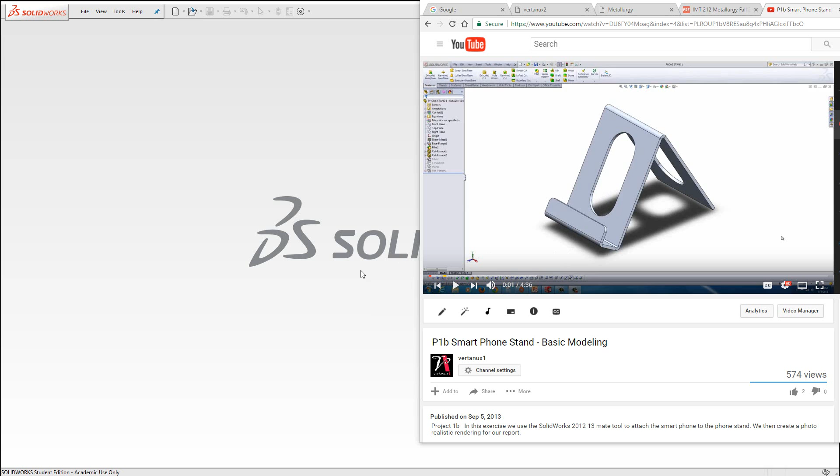Now, the metallurgy information, if you go to vertanux1, vertanux1.com/metallurgy.html, there you'll find everything you need pretty much for this.

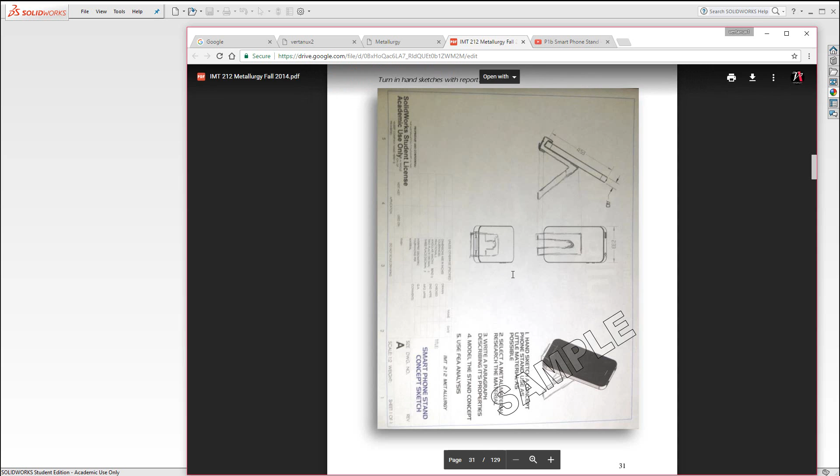The metallurgy training guide, which I have up here, actually has the samples. What I'm going to have you do first is, as you can see here, pass out some drawing paper, and you're going to hand sketch a little bit of a design here. Actually, we'll do that after we come up with our design for our phone.

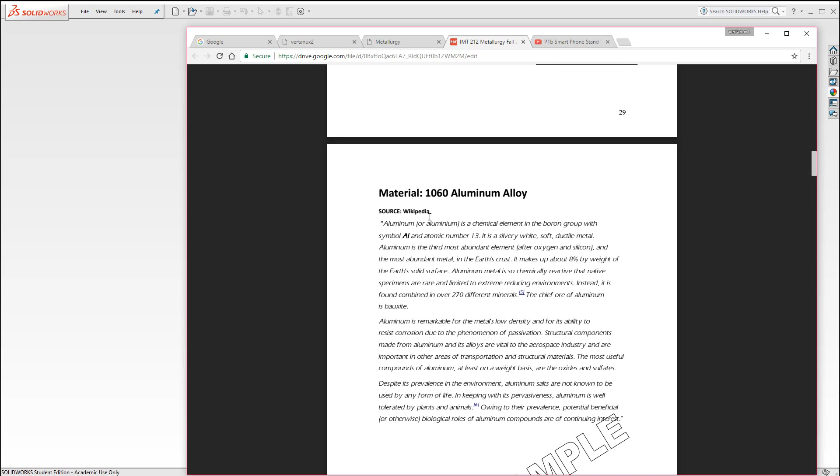Here is a sample of information you'd grab off the internet. This was off of Wikipedia. I don't want you to just use Wikipedia as is, but you have to change it. Otherwise, remember, you have to put it in quotes and source it properly. So that will come later.

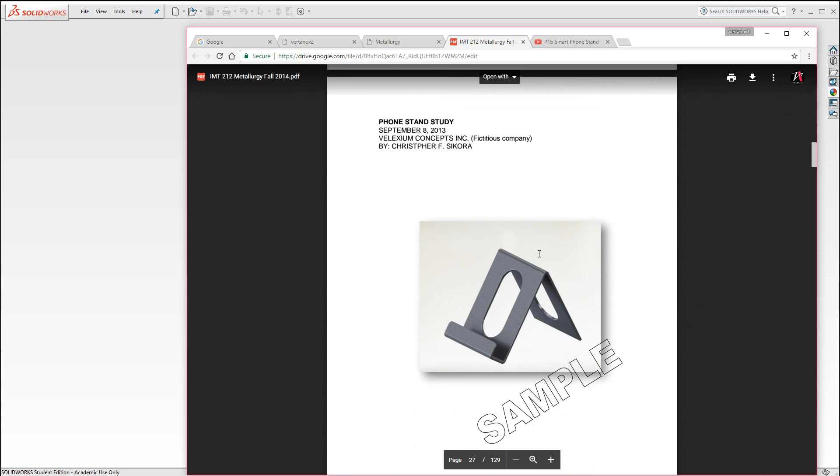But here we can see the drop test analysis that we're going to go ahead and complete. And as we move further up here, there's actually the profile that we're looking to create.

So let's begin with SolidWorks. First of all, start up SolidWorks 2016 on your screen. And you're going to go up here, there's a little white sheet of paper, New.

But otherwise, you could see over here, there's this little arrow. If you go to that arrow, it gives you the pull-down menus, and I like using the pull-down menus—they're a little easier to navigate than just trying to describe an icon to click on. Once you get that, tack it in with that little thumbtack, then go to File, New, and select Part. Just click on it and hit OK down at the bottom.

Now, what you'll see in this view screen on the left is called the feature tree, or the FeatureManager Design Tree. It's going to contain all of the history of everything you do making this part, everything from the sketches to the extrusions or features that are created.

Up top is your ribbon, these little tabs—this is the ribbon tab. Essentially you'll have Features and Sketch. Go ahead and click on Sketch. All right, those are all your sketch tools up there: lines, circles, arcs, rectangles. That's what you could use to sketch whatever type of geometry you want.

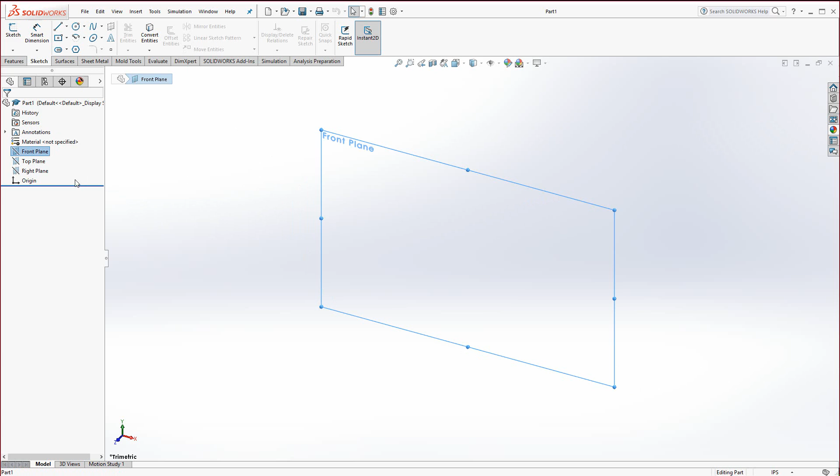Go ahead and select the front plane here on the feature tree. You'll see it highlight in blue when you click on it. Actually, instead, because this is going to be a phone stand, let's select our right plane, and we'll draw the right side of the phone stand.

Versus if we were to draw it on the front, our phone stand would be sitting sideways. So let's click on the right plane, and right here you might get this quick launch tool to appear—if so, it's right next to the eyeball. Click on that sketch, and it will start a sketch on the right plane.

Otherwise, go up here to the Sketch tab and click on Sketch. Beware, do not click on 3D Sketch or 3D Sketch on Plane. Even though this is a 3D modeler, we're not using that.

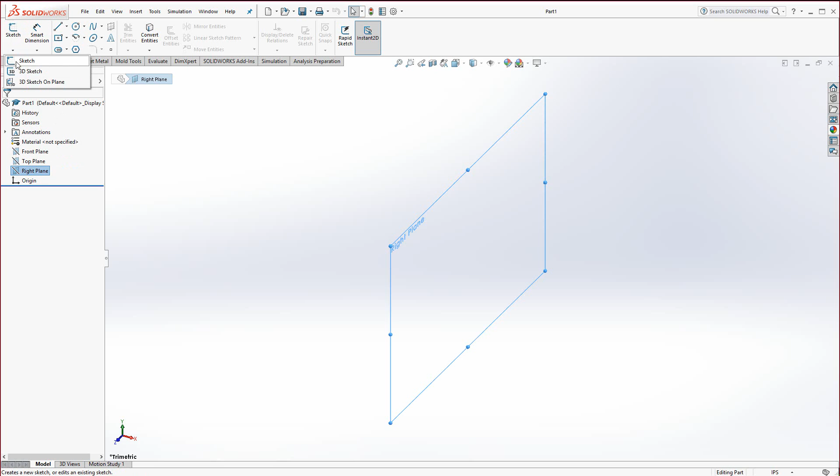Click on Sketch by itself. Now take your line tool. Our goal is to create what was in the book there, and I'm on page 25 of the manual.

You can see it's an angle bracket design somewhat. So we're going to first go up here and hit the little arrow to the right of line and find center line. We're going to draw that center line first. When you click on it, move your pointer and you have a cursor, and it turns orange once you get it to that red origin. That's your center marker in space, your 0x, 0y, and 0z.

When it turns orange, click and drag up a straight line, just like I have. One way you know it's straight: if you get the little yellow box to the right of the pointer and it has a vertical line in it, that means it's straight vertically. Make it about 3 inches. Now that number you get there is just to get you close. Don't worry about it, we're going to add dimensions later on. It's just to get you about 3 inches or so, that's pretty good.

Click, and then you'll see it will try and chain. Hit your escape key in the upper left corner of your keyboard, and it will take you out of that chain. Okay, now again we need to take a look at the manual here.

We have a line going at a 30-degree angle off of it, and then another line at 60 degrees, and it's aligned to the base, and then this little angle here. And it's 2.5 inches in length. So here's what you want to do.

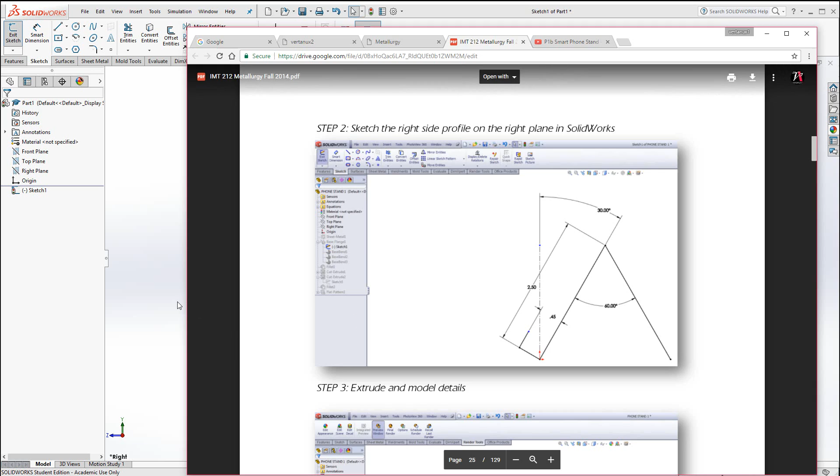Now use just the ordinary line tool, it's just line, not center line. Start off at that origin again. When it turns orange, click and drag it at an angle. Remember, it's about 2.5 inches, so look for about 2.5, and you have it at a slight angle like where mine is. 2.73, that's fine, as long as it's close.

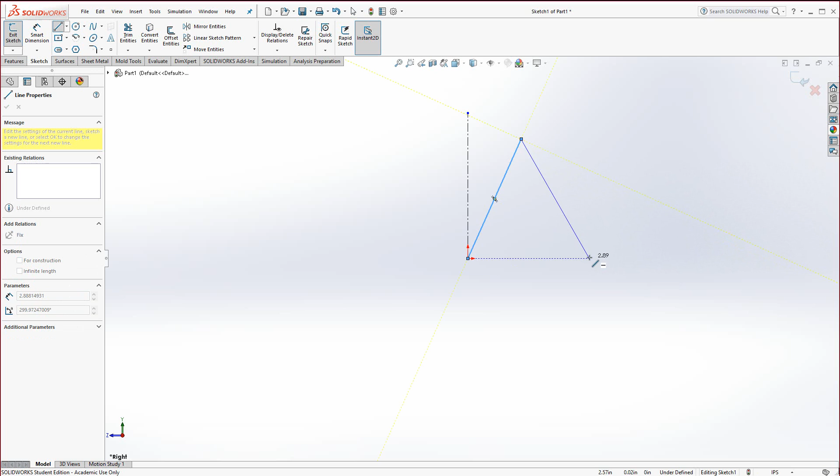Click. Now drag down and drag it down about at this angle, and see how I can infer across—I get that little dashed line. That's an inference line, means it's locking in vertically to that center. But it's actually not going to lock permanently, it's just snapping to it. Go ahead and click, and now hit escape.

Let's add some dimensions there. Go to Smart Dimension up here in the upper left. Click on it, then click on the actual center line. Now, a lot of people like to click on the ends or the middle of the center line—stay away from those for right now. Click on the line as a whole, see how it all turns orange? I'm like right about here. Click. Now, same goes with this line.

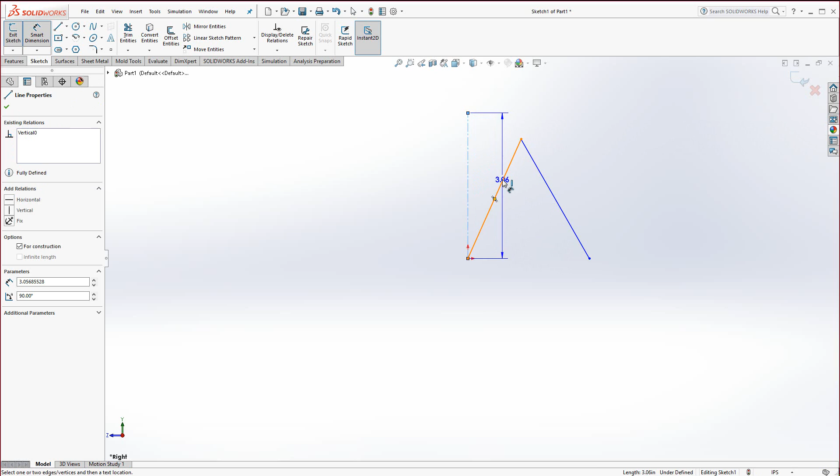Don't click on the ends. Click somewhere on the line about where my pointer is so it turns orange. Click, and get in between those two lines where I am, and you'll see it gives you a dimension. Click one more time. When I say click, I'm saying click with your left mouse button, okay?

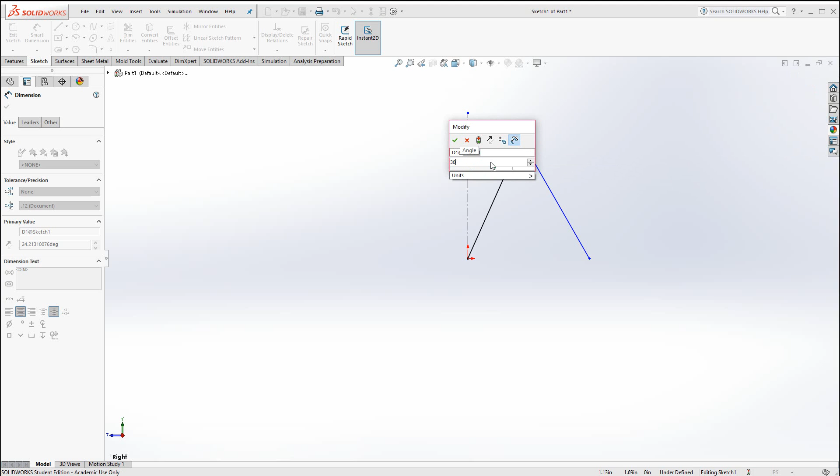Type in 30 on your keyboard. Now, you might have to hit the number lock if you're using the keypad on the right. Hit that little number lock button to make sure numbers are on. Otherwise use the numbers at the top, that's fine too. All you have to do is type it—look, you don't have to click in here, it's automatically illuminated. Just type 30. You don't have to type 3.000 or whatever, just 30. Hit enter, and it will change that.

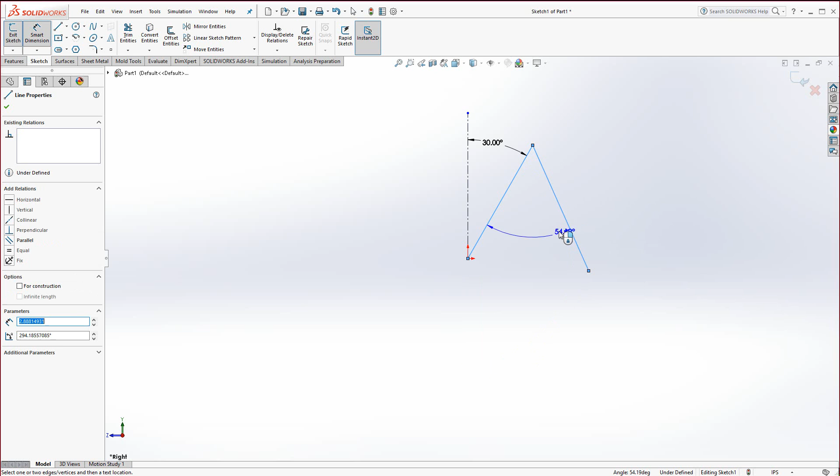Now let's do the same over here. Click on this line, again not at the ends, not in the middle, just somewhere on it so it turns orange. Now go over to this line, and don't panic when you see that weird dimension—it'll change in a second when we click on this line. Now get between the two, click and type in 60 for 60, it's a 60-degree angle.

Go ahead and hit escape. Now what we want to do is lock this in vertically to that line. So hold control down—notice the control key is in the lower left corner, that's a typical one you want to use. Hold that control key down and don't let go. Now move your pointer over the origin. When it turns orange, click one time and release it. Now move your pointer to the right and click on that little dot while holding control. This one's the critical one. Control enables you to select more than one object, otherwise it turns itself off.

So click while you're holding control. If you didn't get these little add relationships over on the left, hit escape a couple times and try that again. Holding control, select both points, 1 and 2. On the left, what we're looking for is vertical.

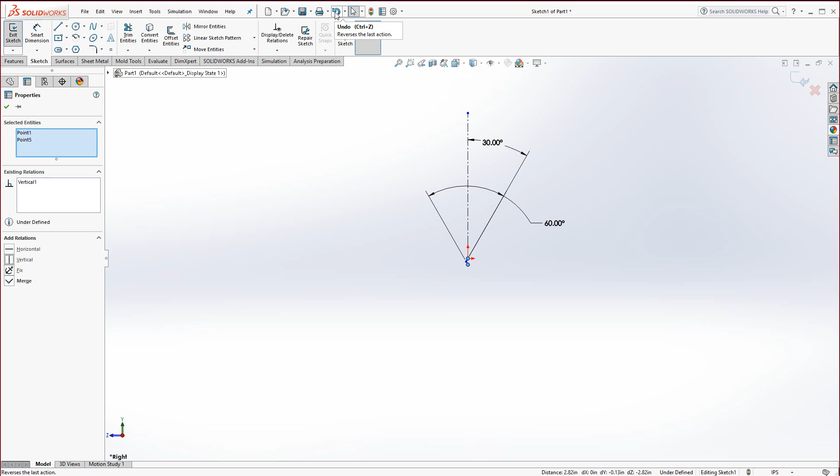Oops, look at what that did, it moved it to the line. Now this is where we have the undo button up here. Take a look, there's undo. Hit undo up here, it's that little arrow.

Now let's go with horizontal and see what that does. Look at that, it aligned it. If we were to draw a line across here, it'd be perfectly linear to it. So there we go, okay, now let's take a look.

We want to go back to Smart Dimension and click on this line right here, see the one that's turning orange? And unfortunately, I still had something selected. So it's not a hard thing to just hit that little red X right here on Modify.

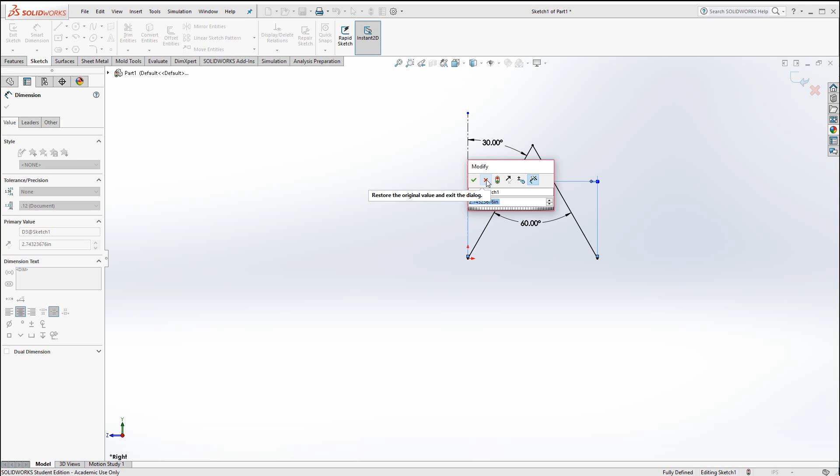I made a mistake. Now you could actually hit the delete key when something is selected. If it's not selected, hit escape and click on the line here, this thin line for the dimension, and hit delete on your keyboard, that's right above the arrow keys, the delete key. Go ahead and hit it one time and it deletes it.

Okay, now what we can do is let's click on that line, just on it, not at the ends, and drag it out just a short distance. Notice it's parallel. This dimension is parallel. That's what you want. You don't want this, you do not want that.

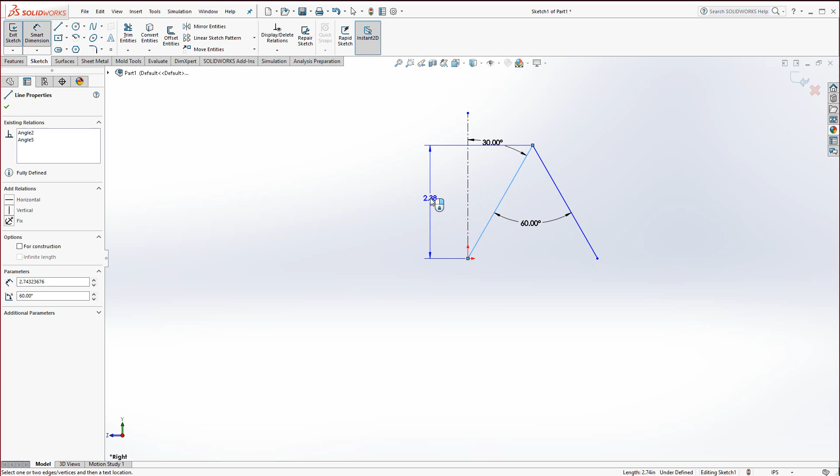Get it to where it's parallel, click, and type in 2.5. Again, you don't have to type 2.500, just 2.5, hit enter. And look at that. Now all we have to do is go back to the line tool now.

Go up to line and glide up to this point right here, click, and follow this line out, maybe about an inch or so. Okay, right about there looks pretty good at an angle. And then follow this.

Now look at this, I got perpendicularity. See that little perpendicular symbol? It looks like a half of an I-beam to the right of the pointer. It's in yellow. You want to try and get that if you can. Okay, and just click up here.

Don't worry about the dimensions so much because we're going to add dimensions now. So it's just a little line at that angle and up here. But let's make this line perpendicular to this because I don't think I captured that. We could add a dimension of 90 degrees, and that's perpendicularity, but I'm going to show you an easier way.

Rather than typing in numbers, hit escape on your keyboard about 3 times just to make sure you don't have anything selected. Now, holding control, select this blue line right here, and you're still holding control, click on this line right here. If you didn't get those two, hit escape a couple times, hold control, try selecting them again. Really, you only have to hold control for the second or third items. In this case, there's only 2, so it's just the second item.

Over here to the left, you'll find perpendicularity. Click on that, hit the green check. Now notice the line turns black. As you fully define these things, you know they're finished once they turn black typically.

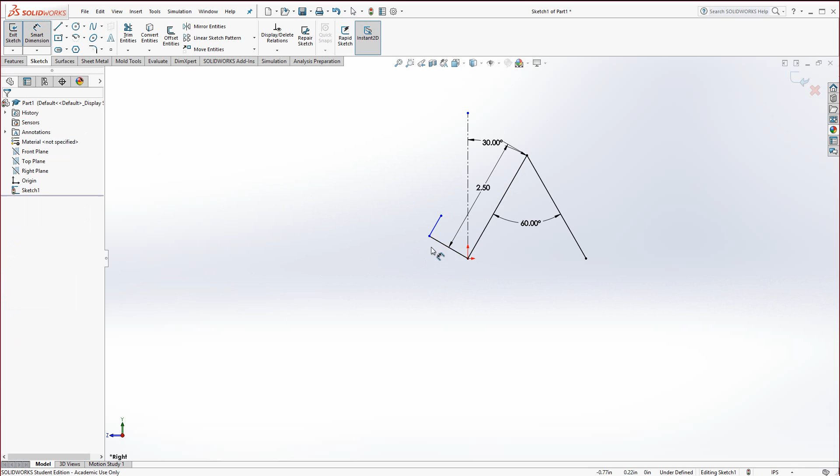Okay, let's go to Smart Dimension. Click on this little line right here. You could click on the endpoints too, either or is fine. But try and get it parallel like this. Get it parallel. Don't get it down like that's good, but don't get it down like this. You don't want that. So click here, and let me take a look at the manual.

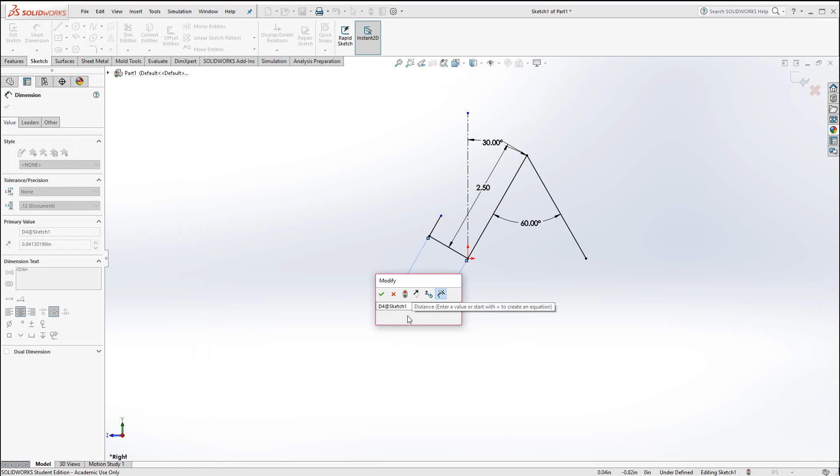That needs to be 0.45. Now be aware, you could use a ruler on your, or a scale on your phone if you want to make this for yourself and change these so your phone fits. This was designed for like a typical smaller sized 4-inch screen, 4.5-inch screen, so this might not fit all.

Now go ahead and click on this line. Again, stay away from the ends on this one. Drag this out again so it's parallel. It's a little tricky there, but once you get that down, let's take a look. The manual says that needs to be, you know, I don't have a dimension there, but let's go ahead and put one in. Let's make that

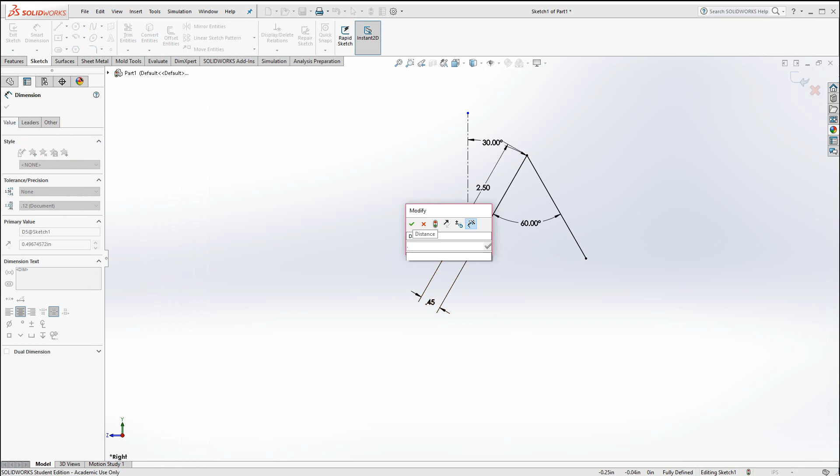0.375. Okay, by the way, you might notice I'm actually in IPS here. This is how you change it from millimeters to inch pound second. Make sure it's an IPS. It might scale it, and you'll notice it's very small.

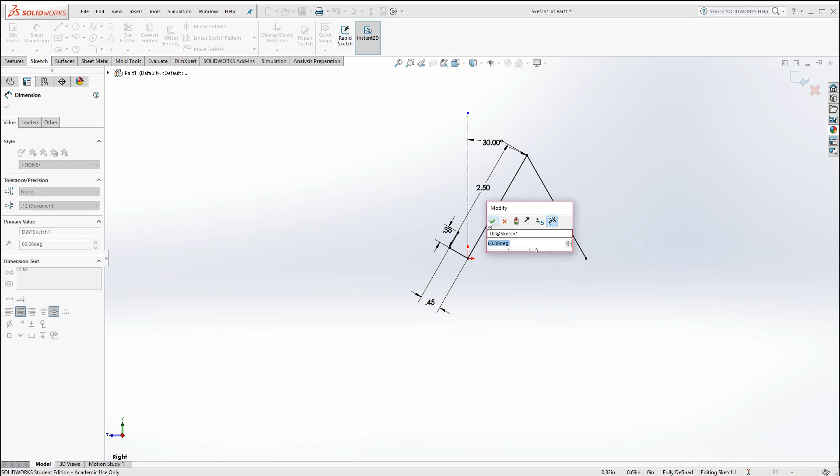If I forgot to tell you that earlier, my apologies. But you could go and double click on the dimensions and change them if you need to. The angle dimensions should stay the same. It would just be these.

Okay, now I noticed, there we go, it looked like I had a little arrow there. Just want to zoom up. You could zoom in and out with the scroll wheel on your mouse. Just scroll it back and forth, point where you want to zoom to, and keep that focus point as you scroll back and forth, and you could rearrange it.

Okay, we're ready to extrude this, but first we've got to bring up the sheet metal tab. Now I have the sheet metal tab, you probably don't, but if you don't have it, remember this is the ribbon. Right click on any of these tabs on the ribbon up here - right click, that's the button we hardly ever use. Right click and find sheet metal and check that box, make sure it's checked, and then you should see the sheet metal tab appear. You might have to click on it.

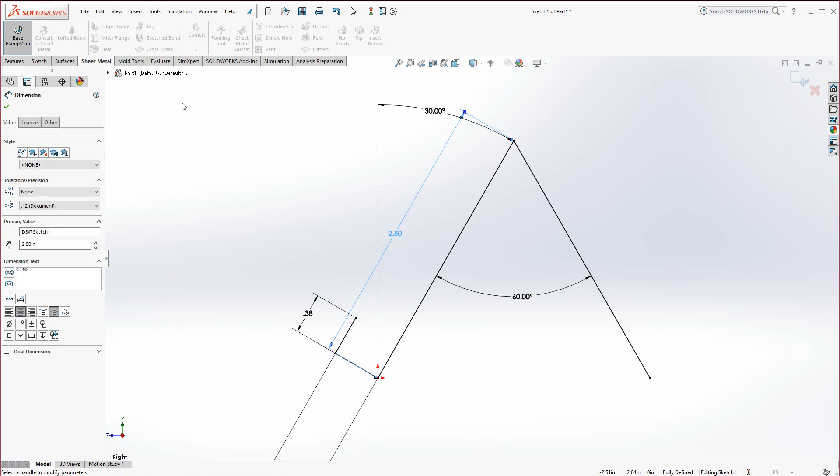And now find the base flange tab. The reason we're doing this in sheet metal is that we want to be able to flatten it and have it cut out using shears, or else we could use plasma or water jet or whatever.

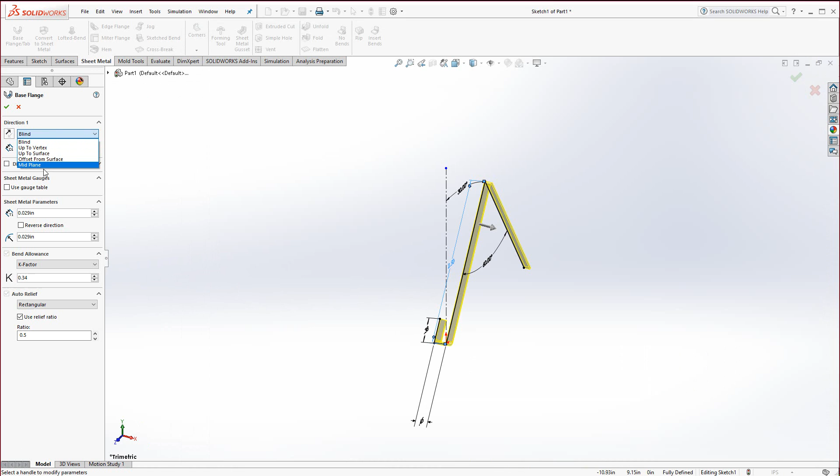Okay, now for the width of this model, let's go ahead - first of all, in the upper left, look carefully what I'm selecting. Hit this little arrow to the right of blind, select mid-plane, set it to 2.5. Oh, that's awfully big. So actually, let's go with 1.5. And you see it changes the width. That looks pretty good.

Okay, now over here, there's sheet metal tools like sheet metal gauges. We're not going to use a gauge table, but the sheet metal parameters, as you can see here, this is the thickness.

Let's go with a little bit thicker, like 0.062, 62 thousandths. Depending upon the sheet metal you're using, if it's aluminum or stainless steel, the thicknesses can vary for the gauges. So you have to be careful to look at your gauge tables - usually you have them in a book. Each company is a little bit different how they have this, but we'll use 0.062. So it could be either, dependent upon - again, it could be a 16 gauge, it could be 12 gauge, depending upon what material you select. Don't worry about that right now, just make sure it's 0.062.

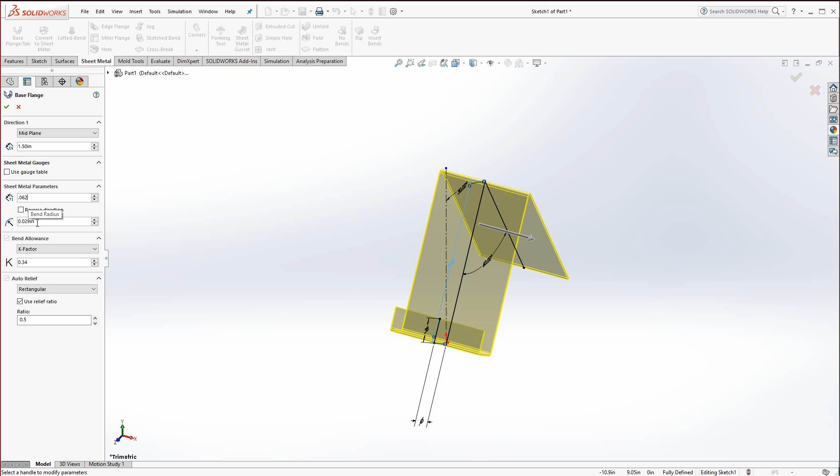And then here is the inside bend radius. 0.029 is a good bend radius. You could set it to 0, but sheet metal fabricators typically don't like to have it set to 0. It makes their job more difficult, and it's a more expensive process to ensure it's done right. So usually you want to put a little bit of a bend radius in there. That's the radius that - for example, if you zoom up here where the bend is occurring, that's what we're talking about.

Okay, so over here, the bend allowance, go with a K factor of 0.34. Notice that there's several different things - there's bend tables, bend allowance, bend deduction, bend calculation. If you want to know more about those, you could always click on the help button up here, the little question mark, and it'll take you to the web. And here you could look up all these different things.

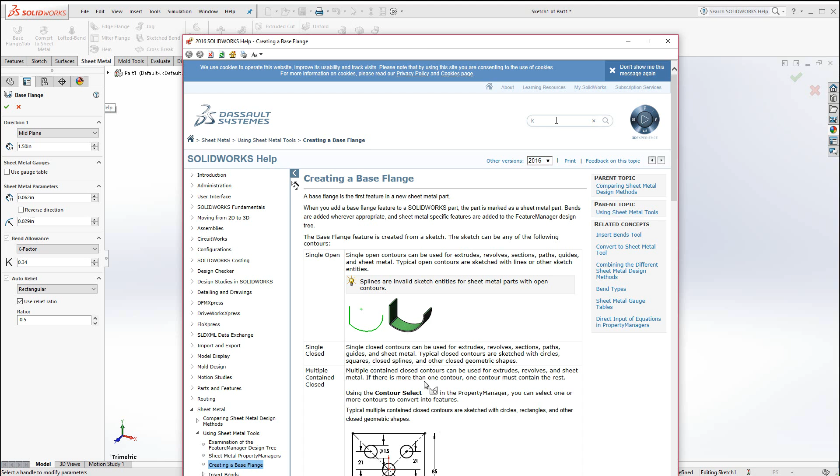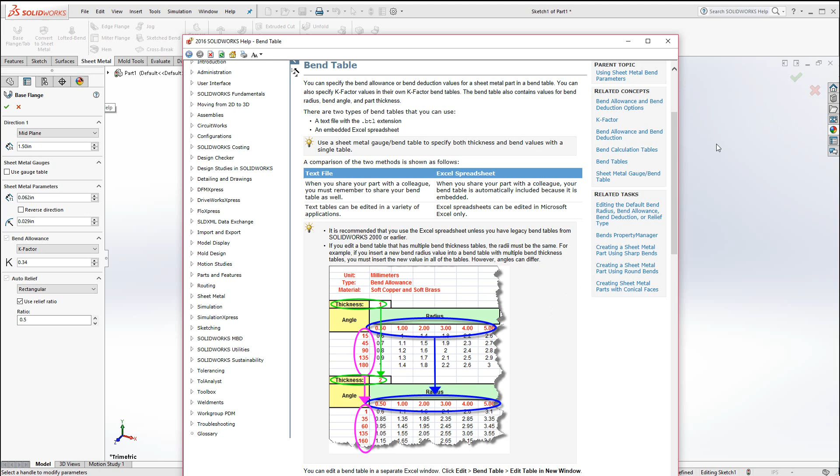Okay, we're just going to leave the rest at this default. Hit the green check mark. And let's go ahead and save this. So find the little floppy diskette up there, save, and you're going to go ahead and name this P1.

Save it maybe to your desktop, or save it someplace you know you're going to be able to find it next time.

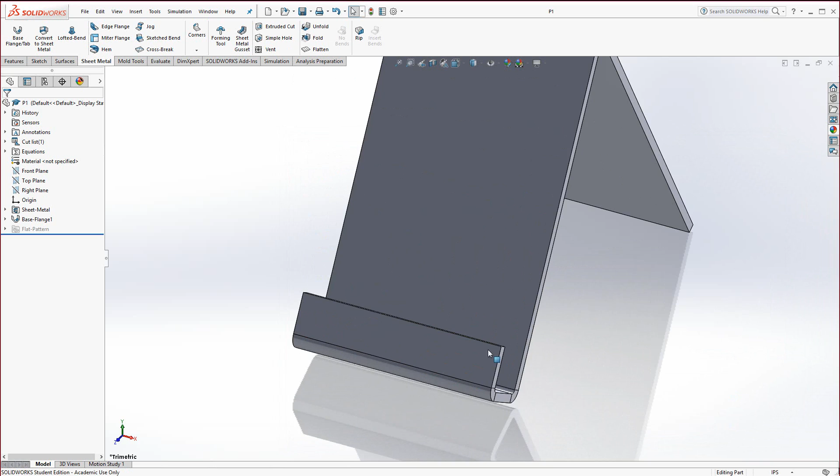All right, we're looking pretty good there. Let's now see these corners. Those are kind of sharp, and that might scratch our phone as we put it in place. So let's put a fillet.

Go to the Features tab right up here and find Fillet. Now set your fillet to, we'll set it to 0.125. Actually, let's set it to 0.2. And it's like filing it down.

So rotate this. The way to rotate, by the way, you could hit your arrow keys on your keyboard and then scroll, or hold that scroll button down, like push it down like it's an actual button, and then move your mouse left, right, up, and down. You'll see it will rotate. Otherwise use your arrow keys — it will rotate in 15-degree increments and so on. But anyhow, you could rotate.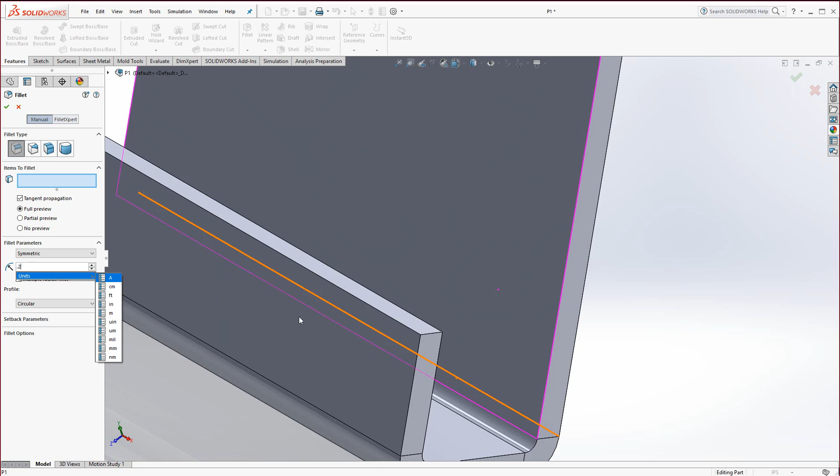Maybe play with this a little bit before you go putting the fillets on. You might want to pause me for a moment and learn how to rotate a little bit. It's a great thing. Otherwise you could also hit your space bar, and that brings up some tools too. But anyhow, take a look over here.

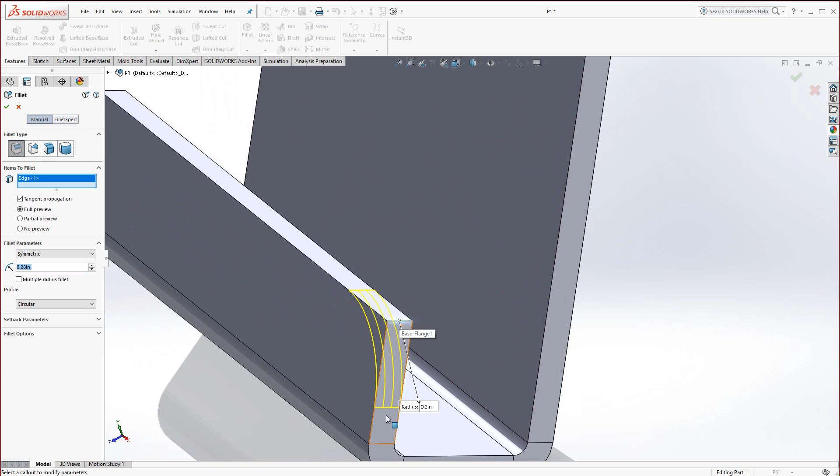Let's resume. See that edge right there where my pointer is gliding over? We want to go ahead and click on that, and there you could see the fillet. Now you may not see that fillet unless you click on Full Preview here, so make sure Full Preview is selected.

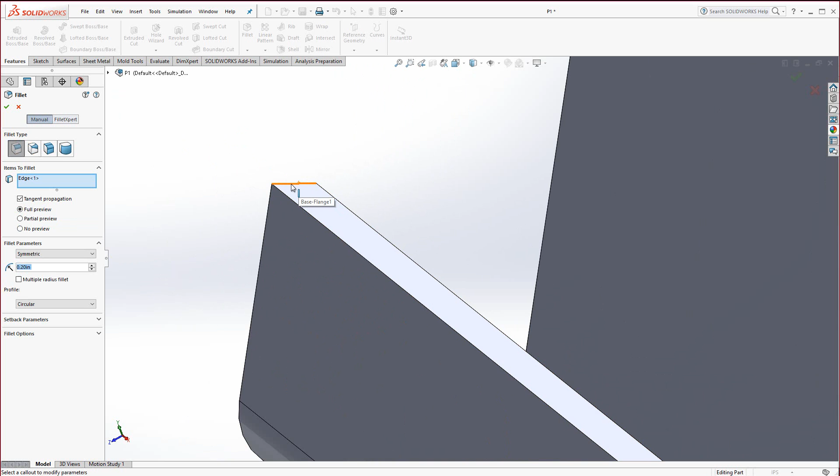Now be very careful, don't select faces. See, like if I select this face, it just turns blue, because it's too small of a face to add that type of a fillet to. This is an edge. When you see the edge turn orange, make sure you're selecting edges for this one. Click on that and you can see your preview.

Let's get the backside too so it doesn't scratch our desk. Go to this corner, click, and this corner, click. Again, I'm using the scroll wheel and pushing it down to rotate. Hit the green check. Okay.

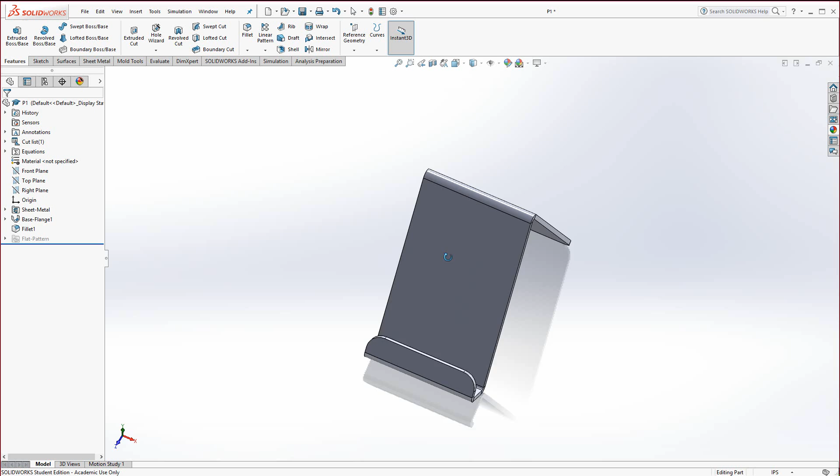Now we're going to go ahead and flatten this so we can put a design on it. This is where you're going to want to hand sketch a couple different designs to put on here. So you could pause me for a while and then take out your paper and come up with your hand sketch.

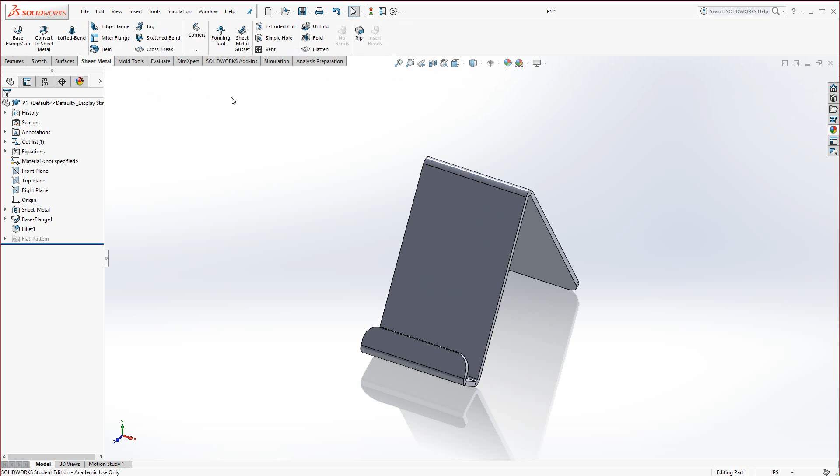What I'd like to do here is we're going to go ahead and go to the Sheet Metal tab, go up here to Unfold, and select, let's see, this face as our fixed face. Hit Collect All Bends right here on the left, and hit the green check mark, and it should flatten it. And there you have your flat pattern.

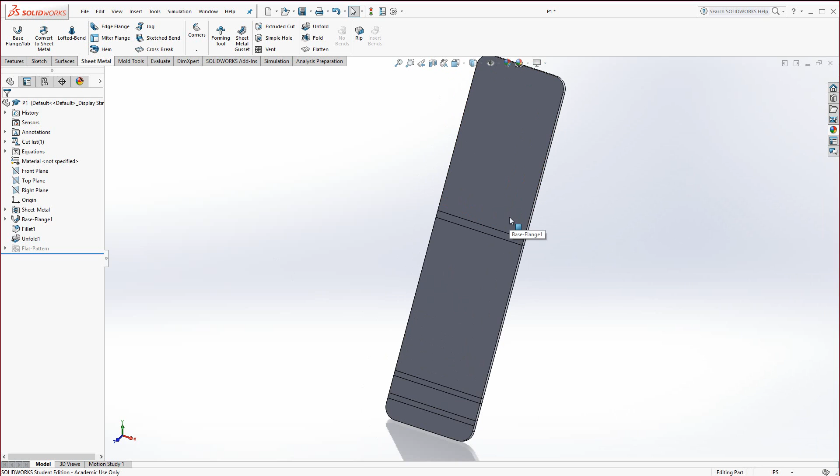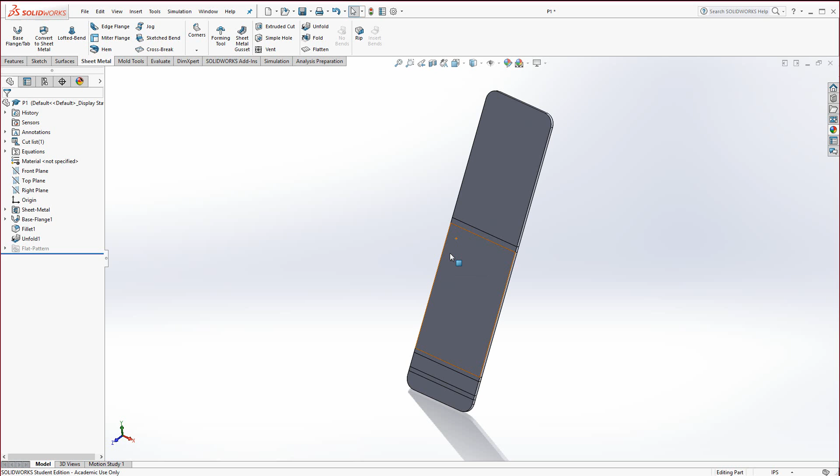Okay, and this is what we could use to cut it out. We could actually export this and bring it into a drawing, then export it as a DXF file, which is a very common file format used for laser jet, water jet machines to cut it out. Or you could even just print it out, lay it as a template over your sheet metal, etch it in with a pointer, and then cut it with shears. That might not be easy — especially 62 thousandths might be kind of hard there — but usually you want a die press or some other sort of method.

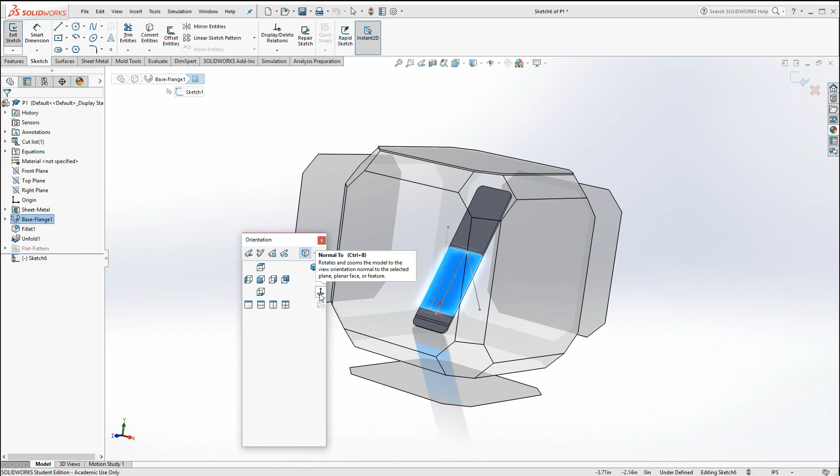But we flattened it in this case so we could actually design our geometry on it. So select this face where I want you to design something and start a sketch. Now hit your space bar, and that brings up this orientation box. See this little button right here? Click on Normal To, or you could use the ice cubes, but in this case we want Normal To, so we go flat or planar to that face.

Okay, now I'm going to draw some geometry up here. I'm going to click and draw out a circle, and then click and drag out another circle, and make a half moon there, or we could do something else. Let's see, we could make some different lines.

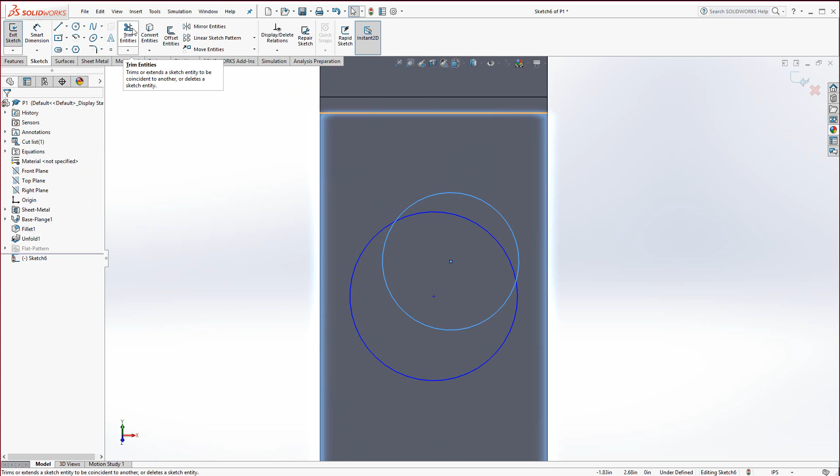So we could go to Trim Entities — hit escape on your keyboard, go to Trim Entities up here. You'll see there's Extend as well. Oops, didn't want that — make sure you're on the sketch tab, the little pair of scissors. There's Power Trim or Trim to Closest. Go ahead and select Trim to Closest down in the lower left, then select these two geometries, and it creates something like that.

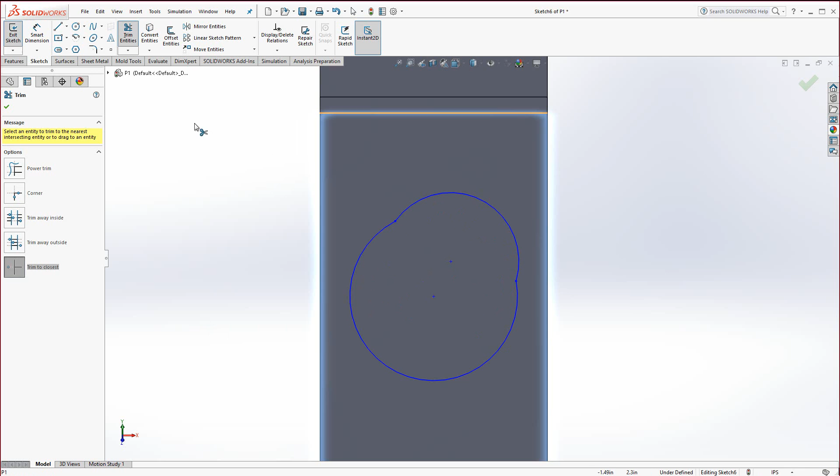Now I'm going to go ahead and draw a little line through — a little thunderbolt right there and there.

Go to trim entities, and you could trim that. You can make it like any sort of Pac-Man with a bump on his head. But anyhow, you get the idea.

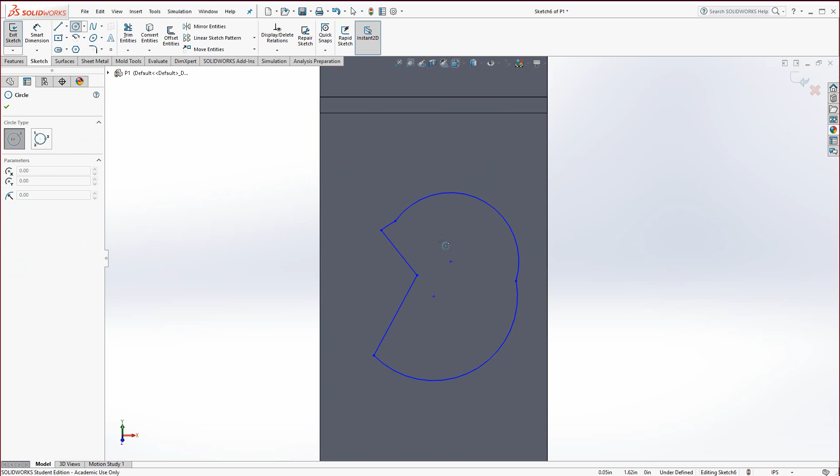Just be careful. Don't add something in here, like let's say you added an eye. The problem is that when this gets cut out, that eye is going to fall out too. So you have to have something in there to hold it.

That's where parallelogram comes in. If you go underneath the line, the rectangle tools, hit the little arrow, you'll find parallelogram. This is a really nice tool.

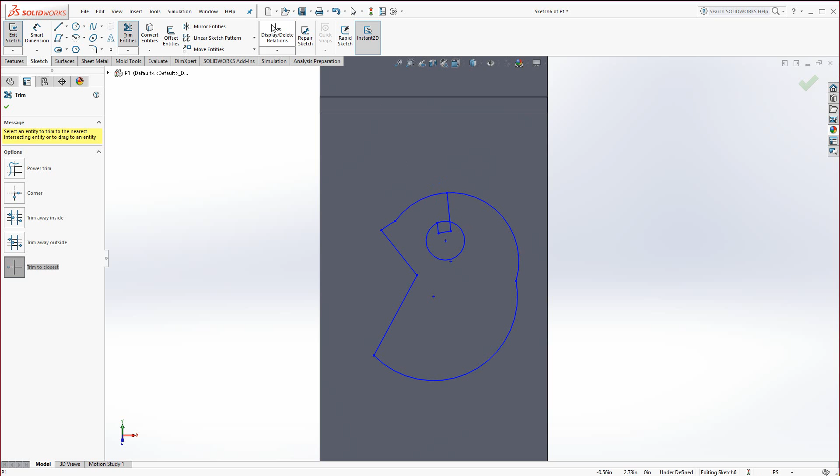It enables you to click and create a connection between that. Now you could go over here to trim entities and trim out this excess material here. Oops, didn't want that. If you go too far, hit undo and zoom up closer. Click on trim entities again, and here, let's click and remove those. We'll open this up and open that up.

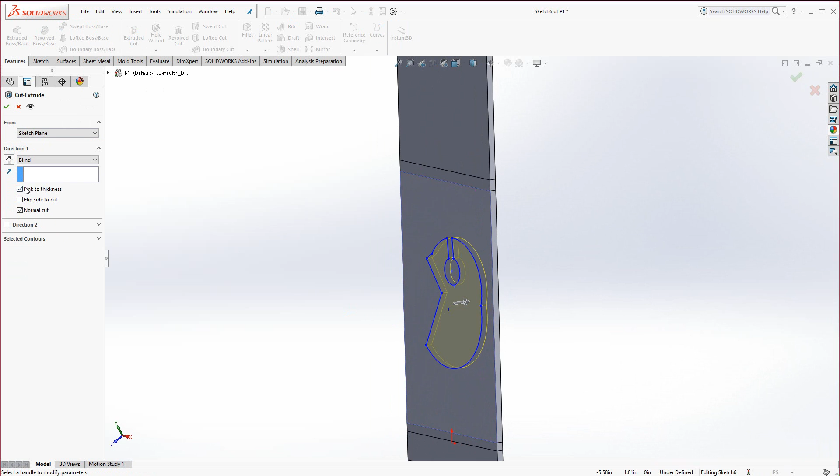Now we could go to features on the left here. Go to extruded cut. This will allow you to cut that geometry out. Over here, since it's sheet metal, you could select link to the thickness of the sheet metal. Check that little box and hit the green check.

And so now I have my design. Beware, you could come up with any design you want. I just threw that together. It's really nothing, I was just doodling.

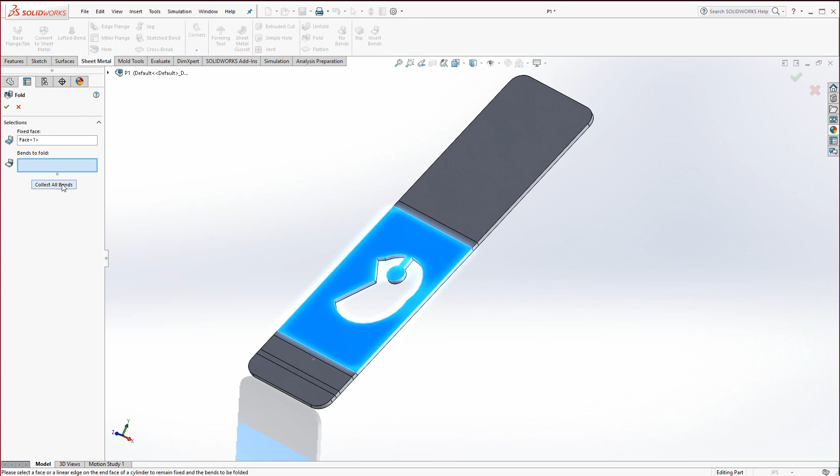Okay, now you go back to sheet metal and find fold, just hit collect all bends and hit the green check, and it will fold back up, and there's your sheet metal part.

Now later on in the next videos, you're going to select a material. What I'd like you to do, go over here to material, actually we'll do it right now. Right click on material on the left and click edit material. This will bring up a materials library of steels, and we're going to learn about steels in this class.

So you can select any of those steels. Notice there's aluminum, iron, copper, zinc. Plastic is not a metal, so you can't use that, or any other non-metals or glass. Don't use those, or even carbon fiber, which is not metal, so stay away from there.

But what we're looking at, let's say I wanted to go with an aluminum alloy, and I'm going to go with a very soft 1060 alloy. You'll see over here you have yield strength, and right now it's in IPS, but we could set it to MPa.

Megapascals is what we're going to use in class. That's what MPa stands for. And here we have the yield strength and tensile strength.

The yield strength is the point at which if you bend something, it starts to not bend back. Tensile is if you are tearing or pulling this apart, and it basically tears apart. It's the point at which it's actually tearing, or necking, as they call it. You might hear that term. But anyway, the 27.57 is a very low yield strength.

That's very soft. An example would be, what can you compare that to? On your body, your bones, typical bones are about 130. So the higher the number, the stronger the material typically is. So 130 megapascals for bone.

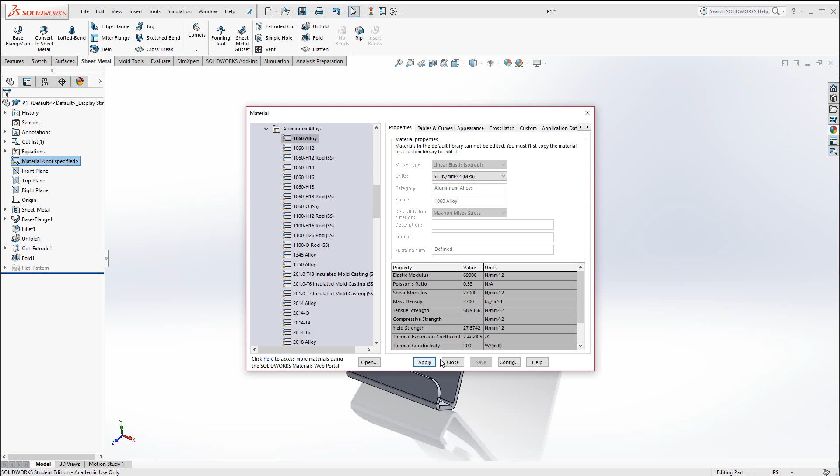Okay, but let's go ahead and hit apply and close, and you'll see it will take on the actual visual properties of that. Now you could go to evaluate up here, the tab, and if you go to mass properties, that little scale right there, it will tell you how much it weighs. So mass properties, and right here, it's 0.05 pounds. So depending upon the material you select, it's going to weigh differently.

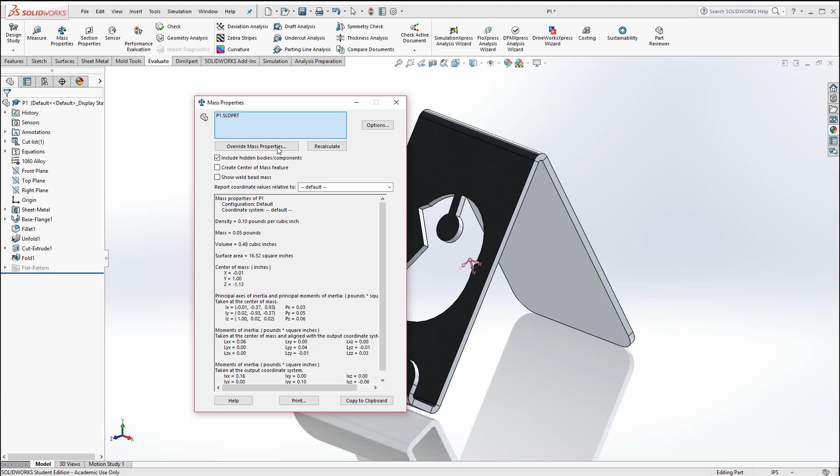Now, that 1060 alloy, I'd like you to go ahead and Google that, or maybe not 1060, pick any of those alloys, and Google it and research what you can find on it, and put that down in about half a page, or maybe two paragraphs, of what you locate. Again, try not to plagiarize, make sure you are taking the information and using your own words. If you do quote it, make sure you put it in quotes and then cite your source.

And that concludes this exercise. Make sure you save it.